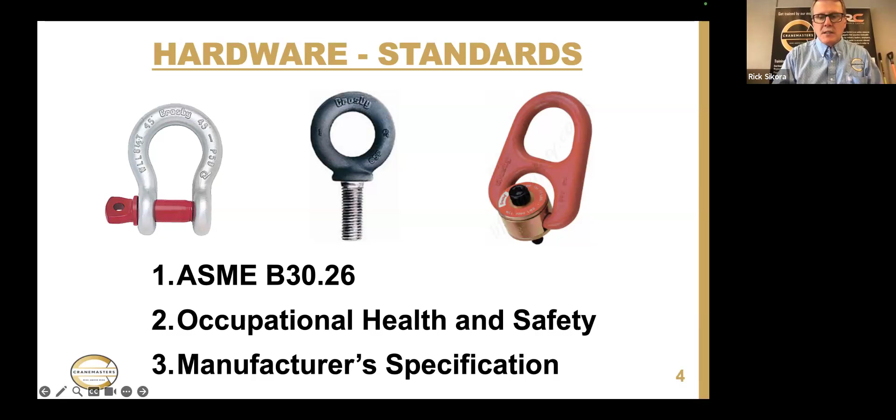Crane trainer - excellent, perfect. Okay, so we're going to read the owner's manual. The very first question I'll ask if something happens on your site: did you provide the worker the information to use the tool correctly? And we do need the manufacturer specifications available on site.

Design factor - what does design factor mean? When I say all your rigging equipment must be designed to a design factor, what does that mean?

What does design factor mean to us? Don't know, Karen, don't know. Safe working load, thank you. Engineered, Sean, thank you, good job. Excellent questions. Watch this here right now.

Watch what's happening, watch the shackle. What's it doing? It's distorting, it's elongating. It's giving me a warning sign before failure.

A 35-ton shackle broke at 280 tons. So on your job sites, how do you know if your rigging products will distort before failure?

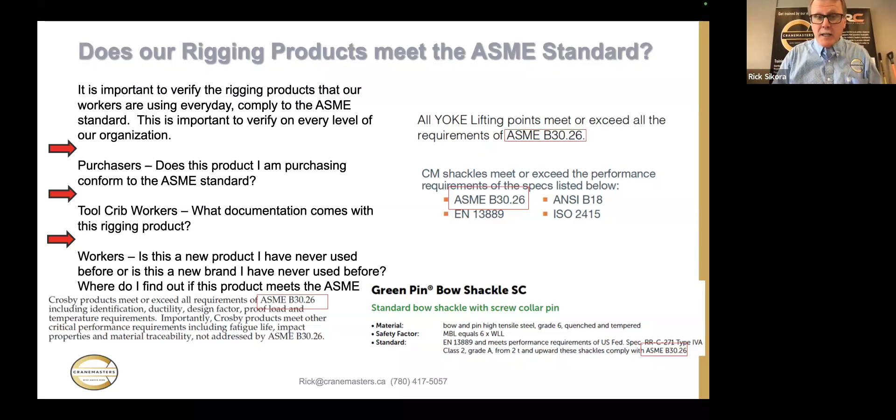How do you know that your rigging products have a 5-to-1 design factor? How do you know your rigging products, if it's rated for 10 tons, won't break until it sees 50 tons? The only way you know that is if it's built to an ASME standard.

What 3 markings must be on a shackle? What 3 markings must be on the body of a shackle? I'm giving you guys 8 hours of training in 40 minutes, so we're going to be quick.

Working load limit, weight limit, I agree. Working load limit. What's the most important thing to be on a shackle?

Rating, manufacturer's name, working load limit, manufacturer, thank you. Thank you, thank you. Pull angle, oh my goodness, Robert, thank you. Out of all those answers that were provided, which ones are correct?

And the most important one is manufacturer's name. No manufacturer's name, no use. Rated load, that's our working load limit. And size, the size of the shackle, okay? The rest of the stuff is extra, but the minimum standards are manufacturer's name, rated load, size.

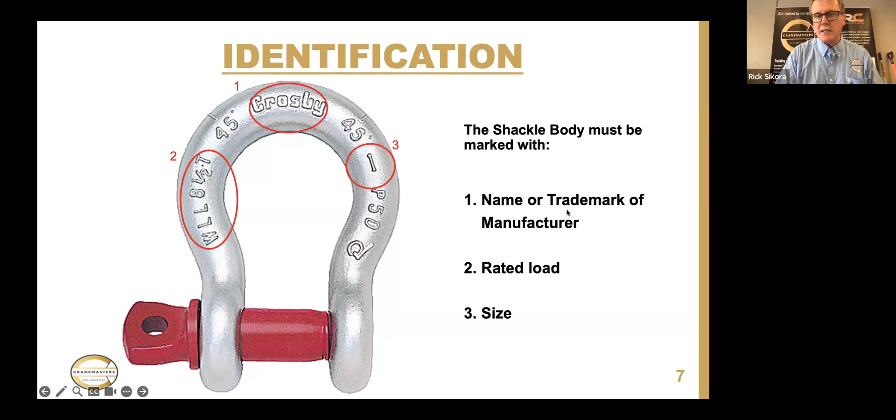Perfect. Why are manufacturer specifications so important? Because there's hundreds of different makes, models, and brands of shackles on site. Are all shackles made for lifting?

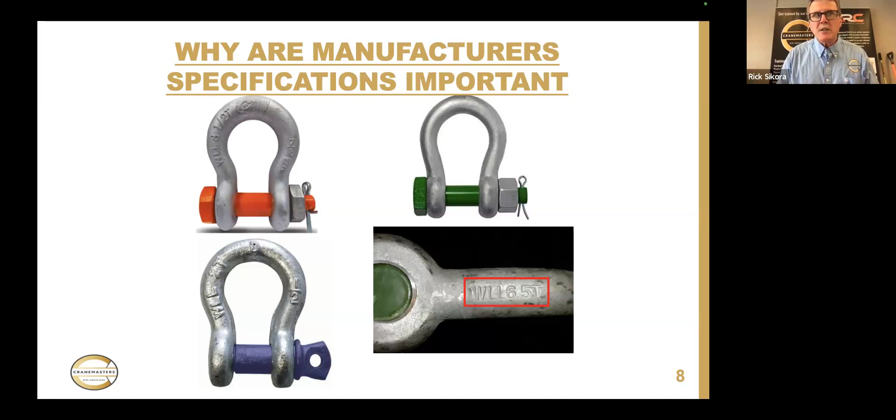No, Daniel says no, Alyssa says no. So if they're not all made for lifting, how would we confirm when they are made for lifting?

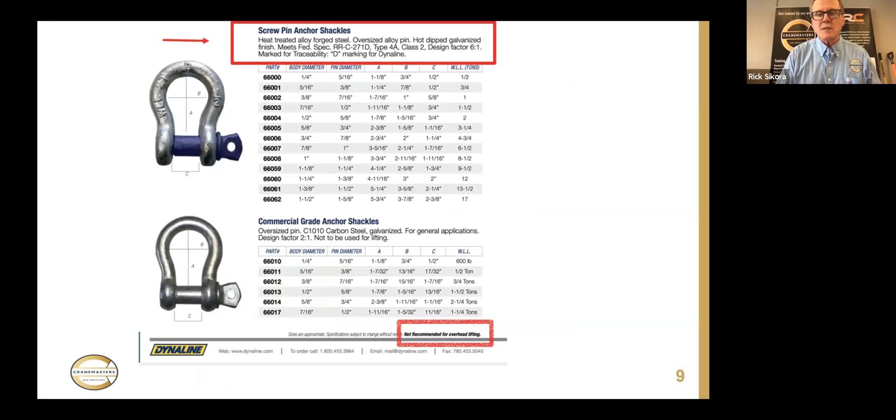And that is by reading the owner's manual. I'll let you know right now, if you read the owner's manual, some of them are going to say not recommended for lifting. So it looks like a shackle, it smells like a shackle, it tastes like a shackle, but that might not mean it's made for lifting.

What brands of shackles do you guys have on your job site? Crosby. Tanya, is Crosby made for lifting? Some are, mostly.

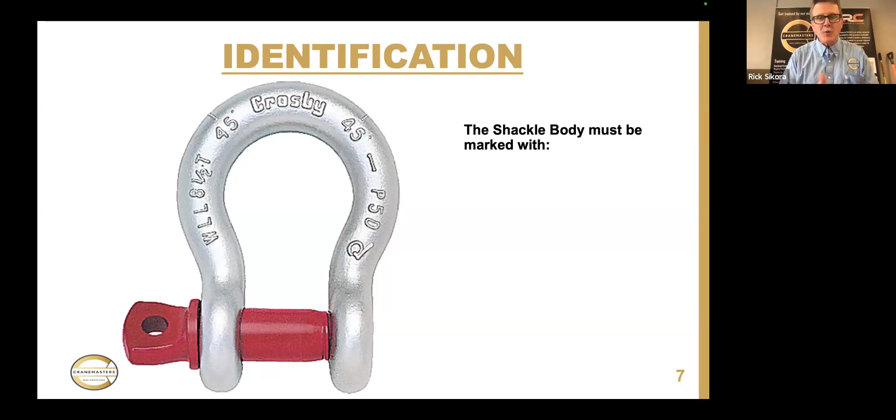How many people read the owner's manual? That's the key. We need to provide our workers the information to use the tool correctly. No owner's manual, no use.

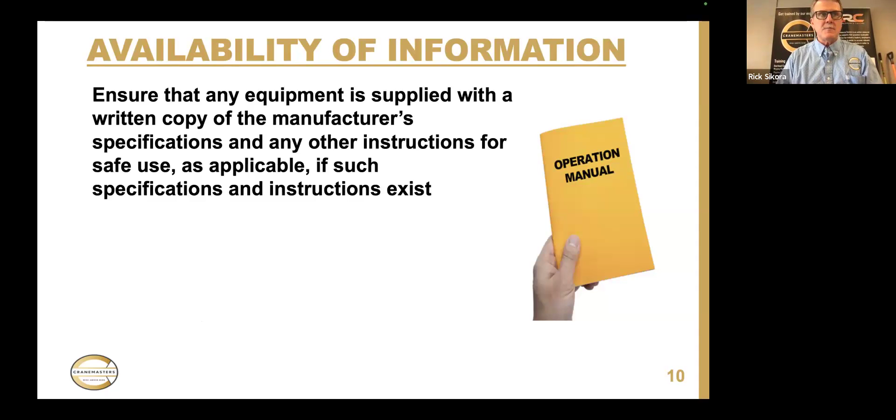Doug, have you ever heard of fake Crosby shackles, or shackles that are imposters?

Half a ton, 5 ton. Look at the manual. There we go, Robert. Look at the manual, there we go.

Did you know that eye bolts don't come with ratings on them? They usually only come with sizes on them.

The only way you know how much you can lift is by looking in the owner's manual. But half ton means the size of the bolt, not capacity. This only tells you the size of the threads.

So all those eye bolts that come on electric motors, pumps, and compressors, are those made for lifting? Do they meet the ASME standard?

What temperature range do you think eye bolts are made to? What temperature range? I don't know. Robert, don't know. Where would I find the information? Ask purchasing, only purchasers, Vanguard, and must be branded.

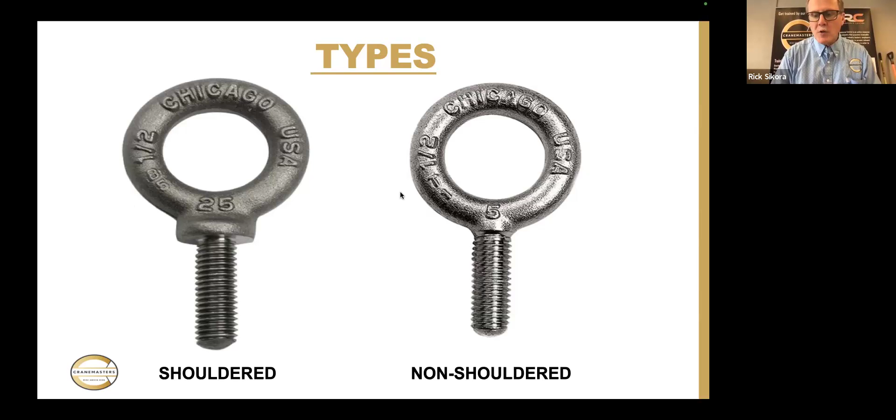No owner's manual, no use. Can't stress it enough. What standards must our slings be based on?

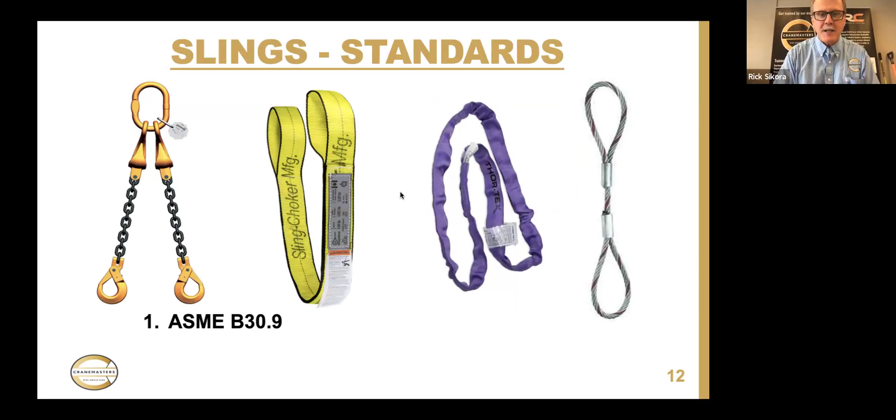What standards must slings be compliant to? ASME, there we go, fantastic. You betcha, and that's written in WorkSafe BC.

All our slings on site must have initial, frequent, and periodic inspections. Initial means when the rigging is brand new, someone from your company must inspect it for compliancy. Frequent means every time the worker uses it, it must be inspected according to manufacturer specifications. Periodic means at a minimum once a year, with records.

I want you to think about your job site you're at right now and in your shops right now. Could you go out there and take a look at every shackle, eye bolt, and sling and make sure it has a periodic inspection or some type of inspection tag on it? Yes or no? I got one yes, I got a lot of no's. How come? It's only been in effect forever. How come we're not doing periodic inspections? How come our workers aren't trained to make sure it has a periodic inspection?

All that's written in the owner's manual, all that's written in the ASME standard.

Does anybody have any bridle slings on site? A one-legged, two-legged, three-legged, or four-legged sling on site? Yes, double leg, yes, yes, yes. Good, good, good. No tag, no label, four-legged.

Karina, I'm going to ask you a question if you don't mind. If a one-legged sling's rated for 1,000 pounds, that means it's good for 1,000 pounds on one leg. A two-legged sling rated for 1,000 pounds, does that mean it's rated for 1,000 pounds on one leg or two legs? Two legs. Two legs straight up and down, or two legs at 60, 45, or 30?

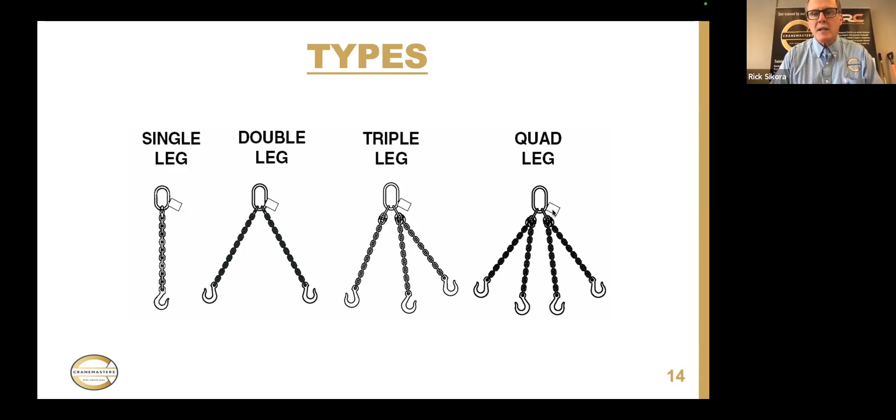But more importantly, what we have to learn today is when the Ford's stuck in the mud and the Dodge comes to pull it out, do we stand next to the tow rope?

I like the no's, I like the no's. What's telling you not to do that? What's telling you not to stand next to the tow rope? Because there's stored energy. Trust me on this, is there not the same stored energy in the sling? How come we're not scared of the rigging slings, but we're petrified of it as a tow rope? Just think about it, it's the same concept. We need to get away from there.

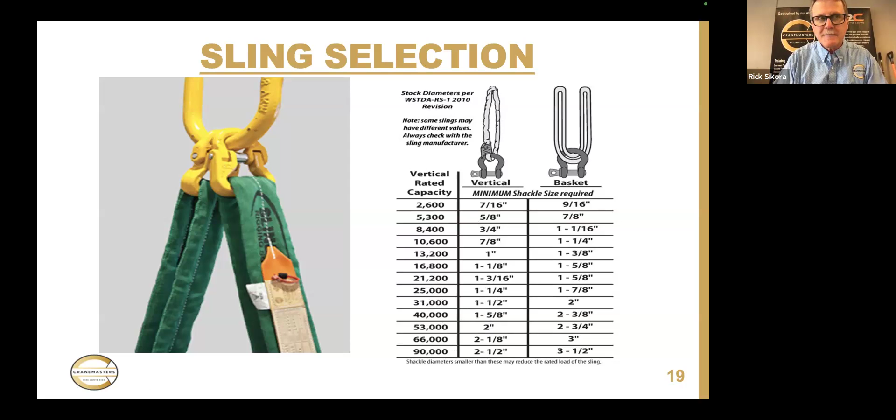How many people in this room have actually ever seen a manual on a polyester round sling? Here's one, never seen a polyester round sling before. Do you know how to have any? Here's a polyester round sling and the owner's manual. It says it must go around 7/8 of an inch.

What do we use to protect our slings from damage? Softeners. What's a softener, Tanya? Rubber. I wish you were here, I'd give you a keychain and a coffee mug. Absolutely incorrect. Leather gloves, incorrect.

Cut resistant material, thank you. And you probably can't see me, but we've got all kinds of engineered manufactured edge protection. Engineered and manufactured edge protection, or else we're assuming. I don't want to give you a number, but probably half of the rigging accidents I investigated between Alberta, BC, and Saskatchewan over the last 2 years were caused from improper edge protection.

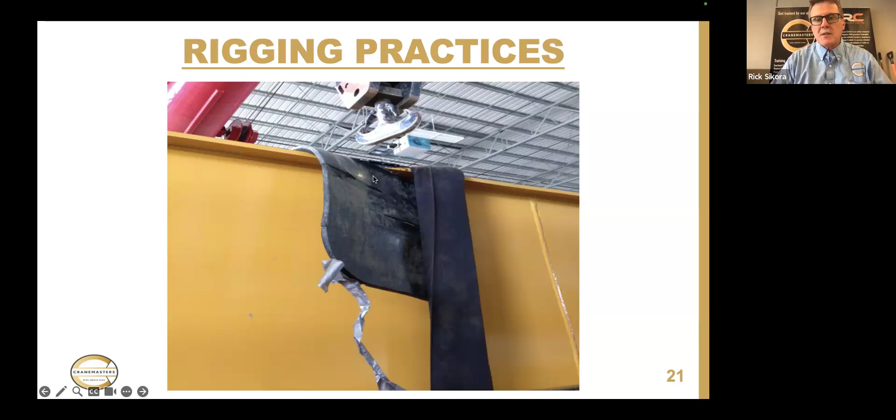This company here assembled the crane. They made the lift, we tried to stop the lift. They said no, it's going to be absolutely fine. They did a test lift. And when they lifted it, the slings blew open like butter and this whole crane came crashing down to the ground.

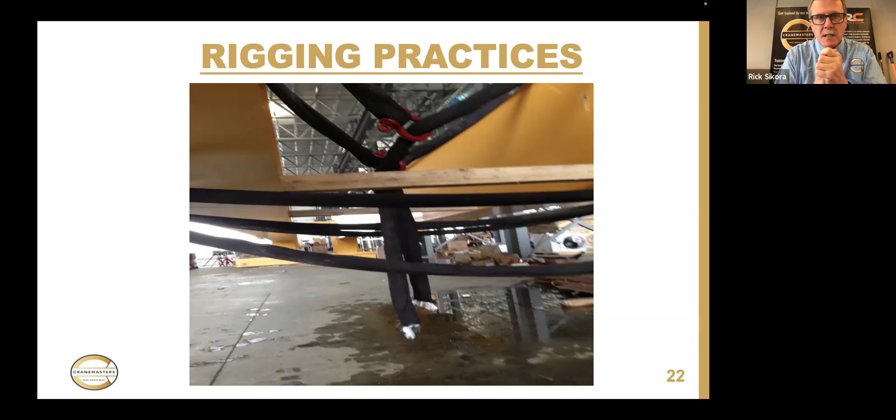If you're ever on a job site and you're questioning whether the sling might get cut in a lift, you have to use manufactured edge protection. I'm watching my time here. Is edge protection mandatory? 100% it is, Michael. Right here, perfect, thank you.

Perfect timing, right in the WSTDA bulletin, that's Web Sling and Tie Down Association. Abrasion protection will not prevent damage from cutting. If protection against cutting is necessary, use only protection that has been designed, tested, and rated by the manufacturer. Thank you for that. So all our slings must be compliant to ASME. ASME says all our slings must be built to the WSTDA standard. Here's samples of different types of manufactured edge protection with ratings.

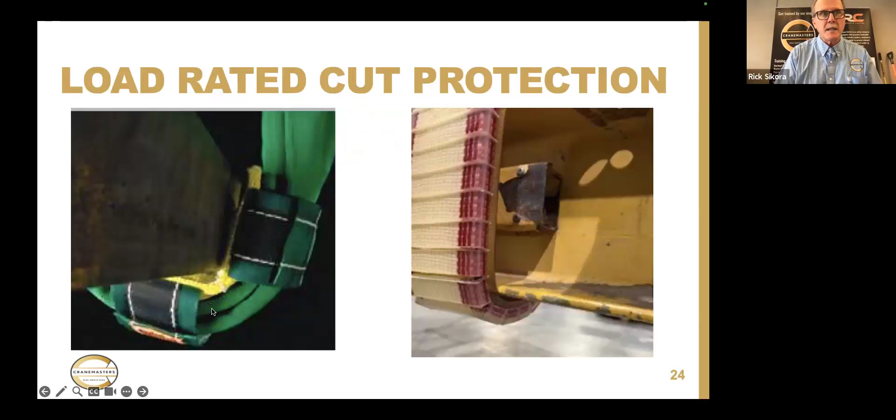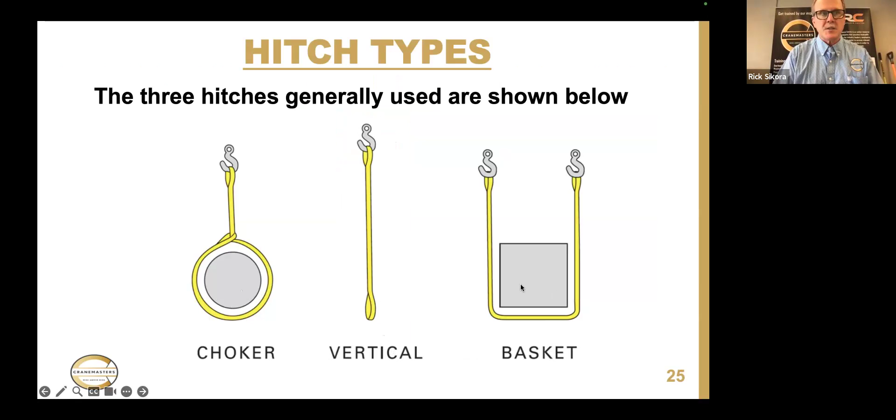When we're using our slings, we have 3 different types of hitches: choker, vertical, basket. Choker, vertical, basket. Vertical is 100%. Choker is about 75% of 100%, and basket is 200%.

In industry, we have the vertical, choke, basket. We have a modified basket. We have a double wrap choke. We have a double wrap basket. What's the purpose of double wrapping?

What does WorkSafe BC say about double wrapping in your act? Mohammed, great, prevent it from rolling. Sean, great, it says any item that is longer than 10 feet, more than 2 pieces, must be double wrapped for load securement. How many people have read the rigging section in WorkSafe?

Tanya, yes, okay perfect. And then we have an adjustable sling. So there's many different types of rigging configurations in industry. How do we make our workers competent in all these different types?

In your company right now, think about your company. How many people have a hoisting and rigging policy? How many have one that references standards? How many have one that identifies competency? It all needs to be clearly identified, please.

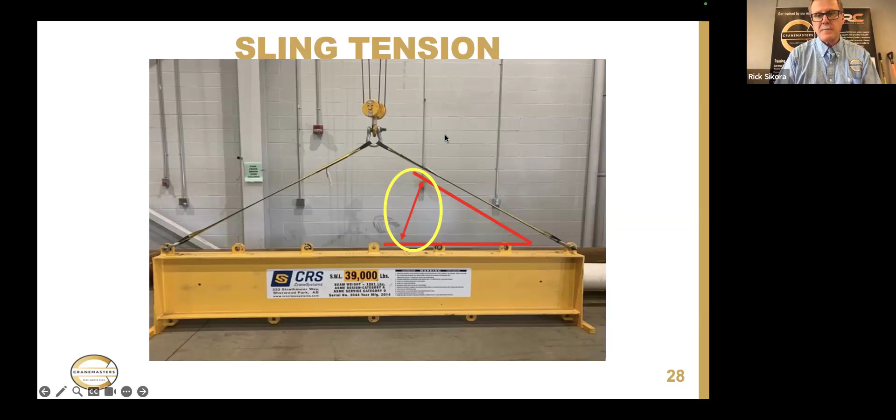So if the center of gravity on a lift was in the middle, that's your balance point, and you had two slings attached to the load, you could say there's 15,000 pounds of tension on each sling, 30,000 divided by 2.

If our slings are at 60 degrees, we look in the owner's manual and it says your multiplier is 1.155. So with two slings holding a load, I go 30,000 divided by 2 times 1.155, meaning I need a 17,325 pound sling here and a 17,325 pound sling here.

Thank you, Doug. It increases. At 45 degrees, I look in the owner's manual and it says it increases by 1.414. So 30,000 divided by 2 times 1.414, I need a 21,000 pound sling on this side and a 21,000 pound sling on this side. If I put a scale right here, it would read 21,000 pounds.

And at 30 degrees, it says multiply the load weight by 2. 30,000 divided by 2 times 2, I need a 30,000 pound sling here and a 30,000 pound sling here.

So what this means is, if we go back and look at a choke hitch, putting it in a tight choke hitch can derate your sling by half. And then when we apply it onto our load, we can really overload our sling.

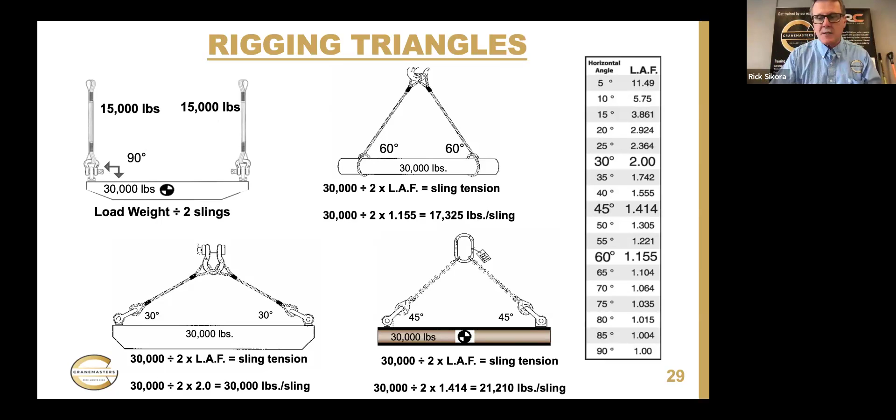You probably can't see my face here, but you have a built-in protractor in your hand. This is 0, this is 30, this is 45, this is 60. You can always tell sling tension by using your hand.

When you lift with 4 slings, we got 10 minutes here, I got to go fast. When we lift with 4 slings, how many slings hold the load? Answers varied: 4, 4, 4, 4, 4, 3, 4, 4, 3, 4, 3. Who's right?

Who's right? Let me rephrase the question. We're going out for supper tonight. We're going to come down. We're going to train our employees to be competent, and then we're going to go out for dinner later because we had a hard day.

And I sit down at the table and I put my elbows on the table and that table rocks to me. Then you're going to come down, sit at the table, and the pack of matches slipped out from under one of the table legs. You put your elbows on the table and the table rocks to you. When the table is rocking, how many legs is it rocking on?

Jim says 2. Shelly says 2. Tanya says 2. Oh my goodness, absolutely right. What moves first in this room today?

What moves first, the crane or the load? The crane. The crane takes off, the load dips, the load catches up to the crane. Then the crane stops - what does the load do? It's identical to that table at the restaurant. It's always rocking on 2 legs.

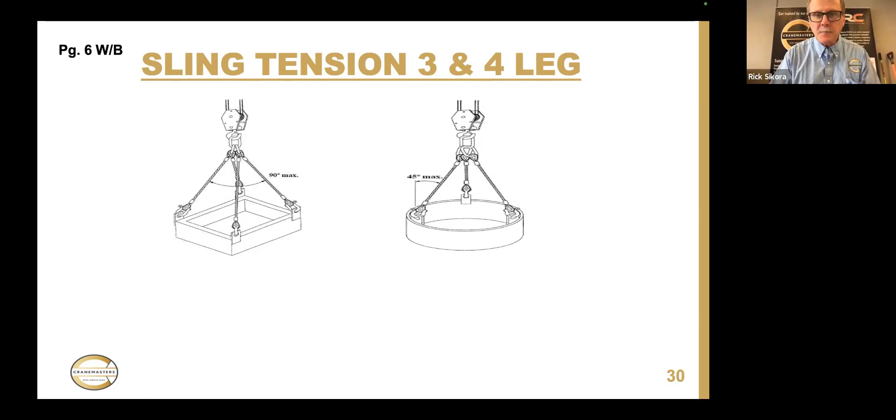Out. Check the manual, look in the manual. Before I say the owner's manual, what would you assume? In or out? In, out.

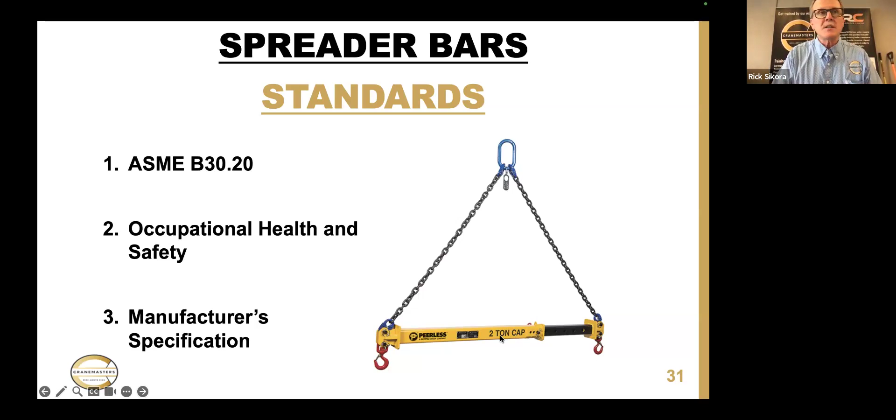I'm loving this interaction today because it's really proving our point about inconsistency and lack of competency, and lack of a clear understanding of what we need to do to change this industry. We are going to change this industry. We're going to read the owner's manual. We can all agree it's strongest all the way in, and it should be rated for the weakest link all the way out. We don't know unless we read the owner's manual. We can't tell. Please don't assume when we rig, and please question everything we do.

We have plate clamps, beam clamps, magnets, grapples, and all these different types of devices. Is there any one of these devices that you guys are using right now that you've seen in your shop setting?

Beam clamp. Tanya, do they use a beam clamp to support a load to hang rigging from, or do they use a beam clamp inverted to pick up a beam? I've seen it both ways. You betcha. Did you know that most beam clamps can't be used at an angle?

Thank you. Magnets - when's the last time you sent your magnet out for a periodic inspection? Is a magnet good on thicker steel or thinner steel? If a plate is 1 inch thick, can it be longer than a quarter inch plate, or shorter? How many surface scratches are we allowed to have on the bottom of a plate clamp? Have we given the workers the owner's manual of a plate clamp magnet?

On a plate clamp, can you take a plate from horizontal to vertical? If the plate clamp is rated at 2,000 pounds, what's the minimum weight it can lift? Doug, if the plate clamp's rated for 2,000 pounds, it can lift a 2,000 pound plate. What's the minimum weight it can lift? 0, 50, 500? Doug, do you think it needs weight for bite?

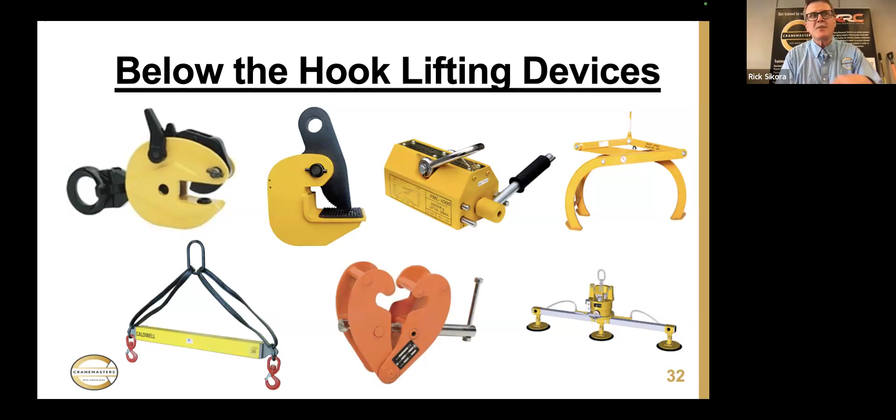Look in the owner's manual, Sylvanus. Thank you, thank you, thank you. I can't stress it enough - please look in the owner's manual.

How many people on site have ever used a lever hoist or a hand chain hoist? How hard are you allowed to pull on the handle? Let me rephrase the question. Have you used 1 arm? Have you used 2 arms? Have you used 2 arms and a boot? How hard are you allowed to pull on a hand chain?

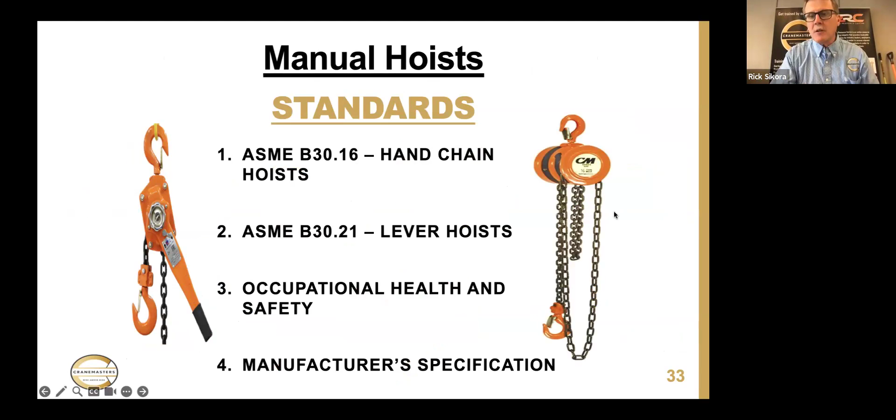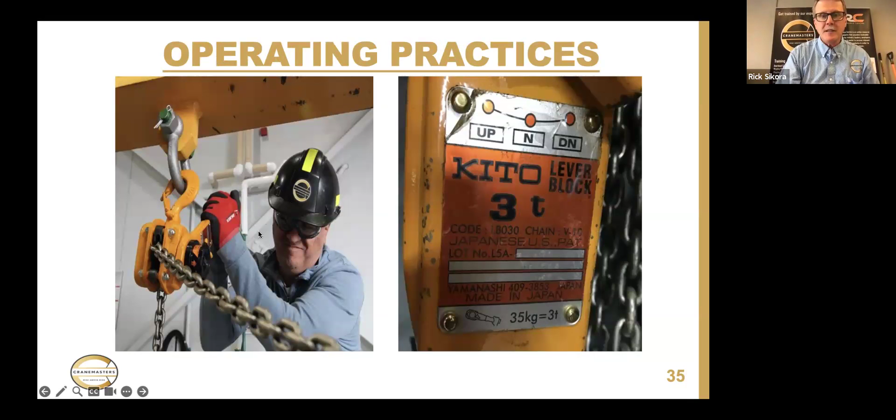You can't wrap the chain around anything. Safety latch has always got to be closed.

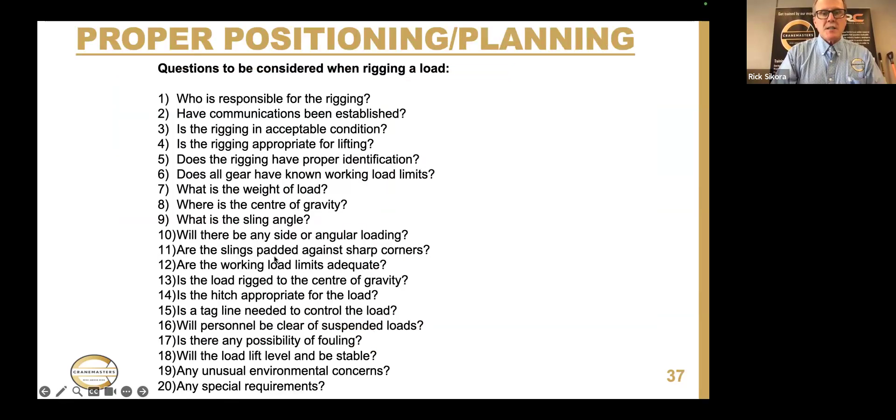Here's 20 questions to consider when you make a lift. I'm just going to skip those right now.

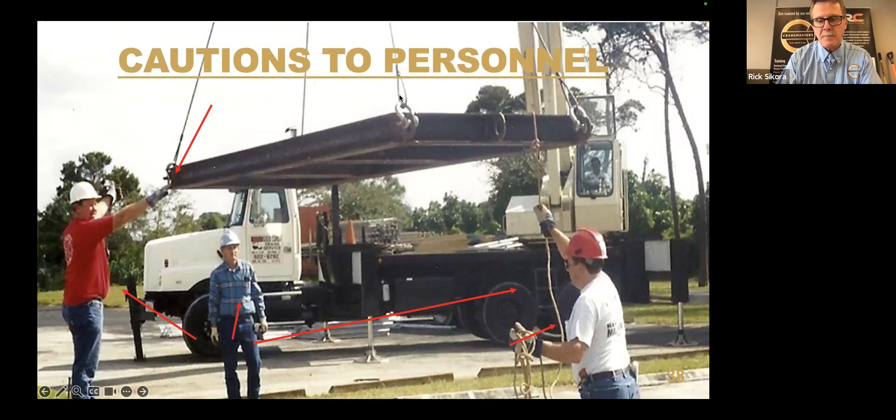Where's the sling going to go when it breaks? Okay.

Good. There's a new product in the industry called no-touch tools. We have push-pull sticks. We have hookets. We got grab hooks. We got magnets, and magnets with handles on them. There's all kinds of no-touch tools.

So in industry right now, there's all kinds of tools out there to prevent the worker from being near the load. It's quick, it's handy, it's fast. It doesn't work in all applications, but you can push and pull, or if you have to grab a tagline, you take the no-touch tool, hook onto the tagline, and pull it towards you. Okay.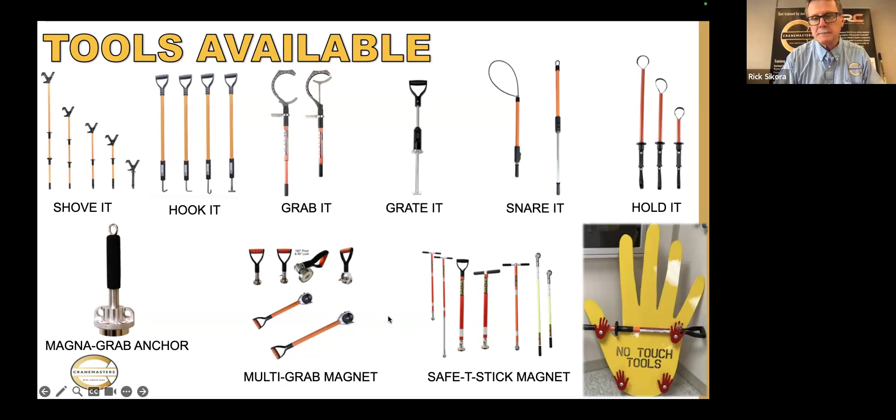We lost a worker in 2013 in Alberta. We applied for creative sentencing funding from the government to start making industry a safer and better place, leading to the Rigging Resource Center.

This site was designed as a free resource for anyone working with rigging equipment. It was developed in 2013 after a fatal rigging incident in Acheson, Alberta. The company involved pleaded guilty under OH&S and was fined. The funds were then awarded to MSA in partnership with Cranemasters to create the Rigging Resource Center.

The Rigging Resource Center can be used by employers, supervisors, or workers involved with the use of rigging components. To get started, look for the product you require information for. You can choose from a variety of rigging products, including slings, hooks, hardware, below-the-hook lifting devices, or manual hoists, and there's even information on non-commercially manufactured devices and lift planning.

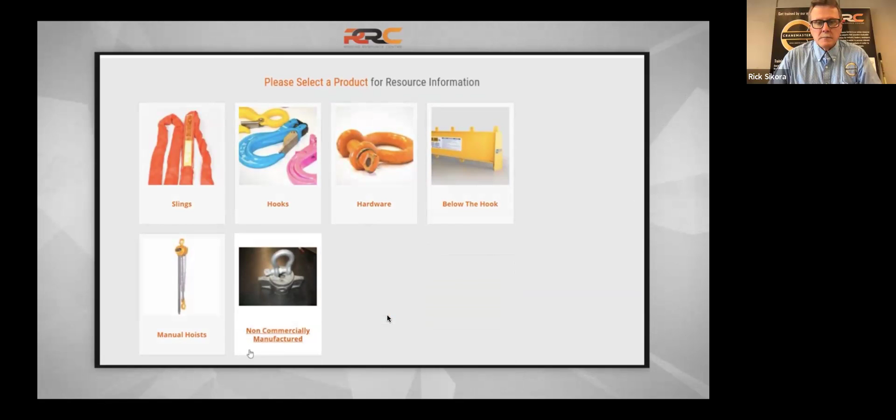For example, if you click on a shackle, the website will provide you information on the shackle requirements referenced from Alberta OH&S and ASME standards. The website will also provide information on the product's required markings, training, inspection requirements, and removal criteria.

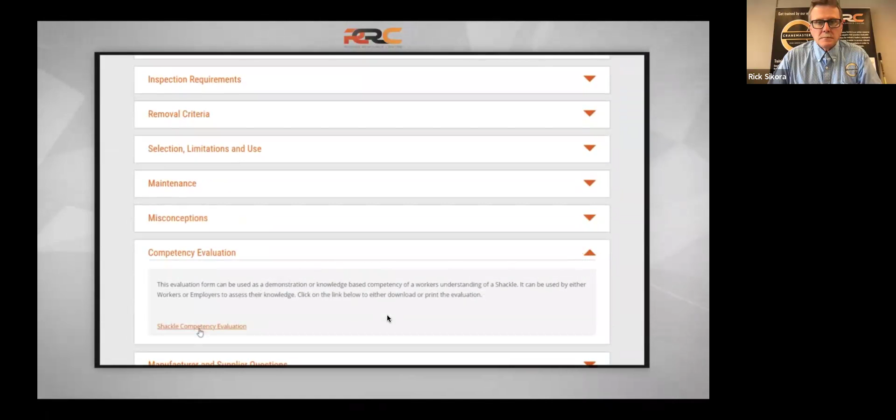Near the end of the item's page, free printable resources are available. They can be used to test a worker's competency or provide questions to ask your rigging supplier. There are even printable toolbox talks to help with your next safety or toolbox meeting. Once you have gathered the information you were looking for, challenge yourself by taking a short quiz to test your product knowledge. For any questions or more information, please contact us through our contact page.

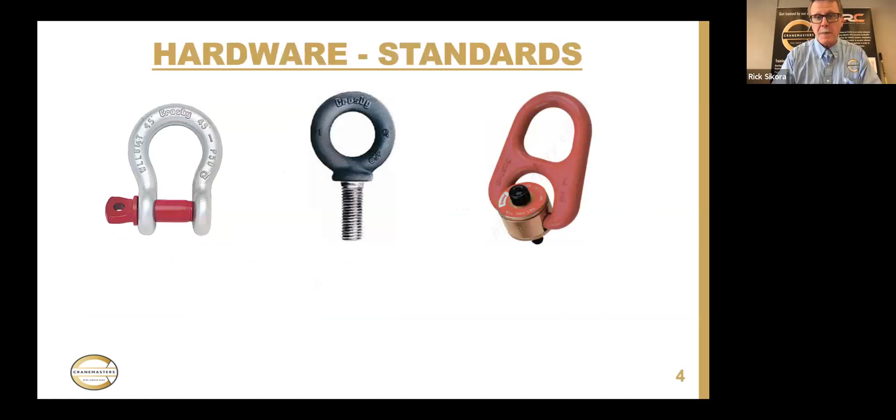So the question is about shifting load weight while rolling units over 20,000 pounds. Is it a round unit we're rolling, or a rectangular unit we have to flip 180 degrees? Double chain basket—okay, that's a really neat one, and chain is a real neat one. If I go down to chain, the first question I have for you: can you basket a chain? What is the radius the chain must go around? Because chain can never go around a 90-degree corner without edge protection.

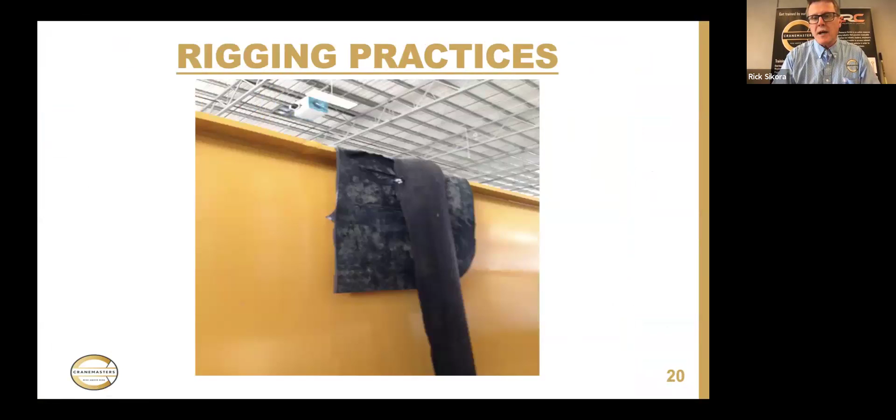What happens to my capacity of a chain when I put it in a basket? Because the chain's always made in a single leg. What happens when I take the chain and now basket it back up to the same ring? What happens to my capacity on the chain?

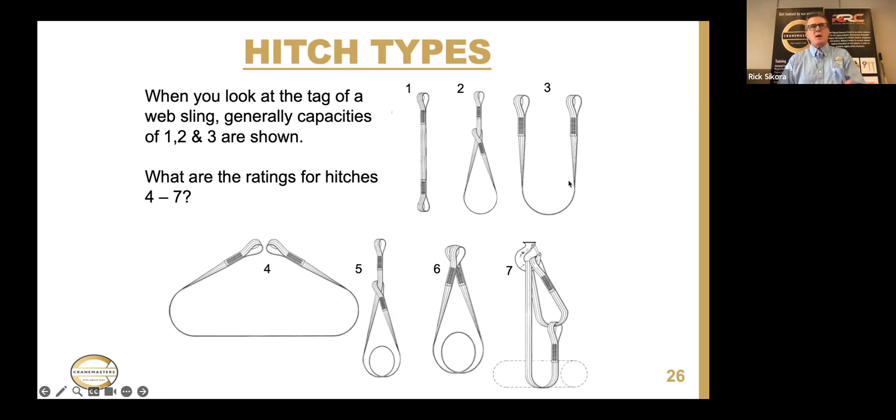Doug, would the rigging product actually slide in the chain, or are you trying to secure it in the chain to prevent it from sliding? If you send Braden a quick email with a picture, I'll give you all the regulations and questions to help you out, because I'm not understanding it 100%, but I can definitely give you sample guidelines.

Great, Doug, please be in touch with us around I-beam. Okay, round I-beam - chain can't go around anything square or a sharp I-beam. So in this picture, chain must go around 2 times its own diameter. For the chain to get its full rating, it must go around 6 times its own diameter.

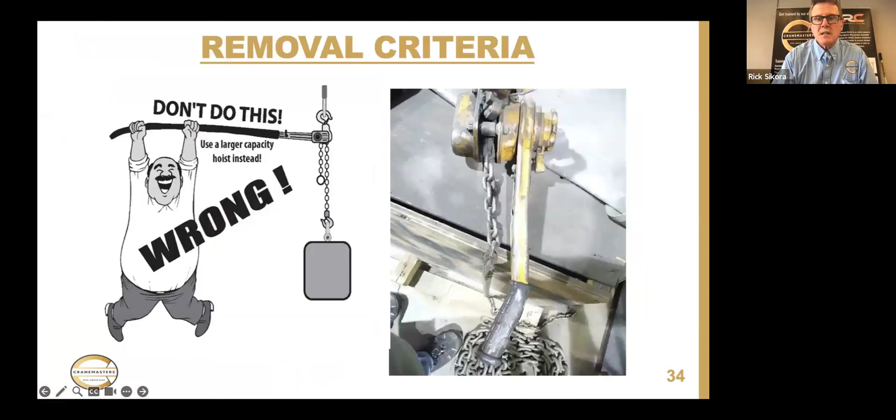Doug, just to reinforce something really quick here, going back to the chain: if this chain link size is 1/2 inch, it has to go around at least a 3 inch radius. So 6 times its own diameter is number one.

A soft steel softener, thank you Doug. You know what I mean? As long as we get that radius there, and we don't want the chain links to slide on the softener - we don't want the chain link sliding. Doug, if you don't mind, send me a picture and I'll help you out on that.

These are the amazing questions, and these are the fun questions, and these are the challenging questions. I appreciate that, Doug.

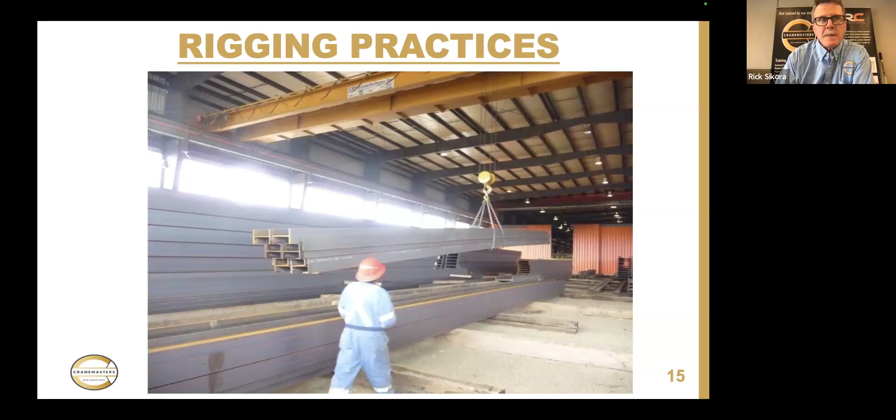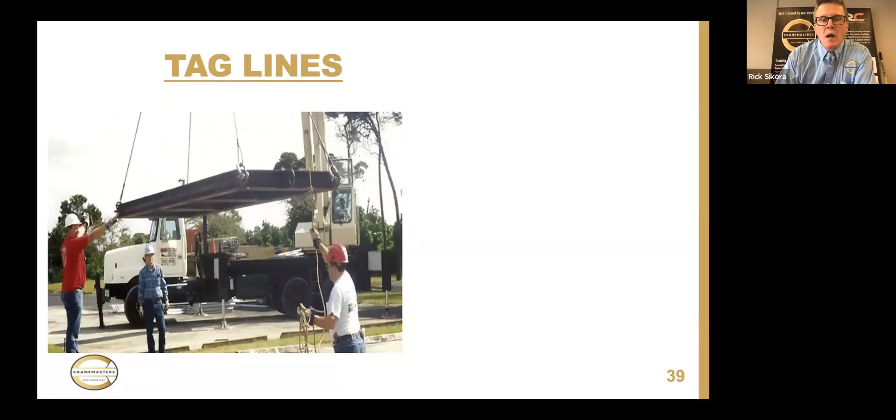Thank you, Doc. Rick, I have another question here from another attendee: can you use a shackle if the manufacturer information has worn off? Oh, that's a great question. So ask yourself the simple question: if I grab a shackle and the information is worn off, would it pass a periodic inspection?

Absolutely correct - you guys answered the question in the chat room. No manufacturer's name, no use. If it's worn off, from a common knowledge point of view, you still know it's okay, but if it lived a life where it actually wore off the name of the shackle, it's probably had a good life already and it's time to remove it from service. The answer is no.

Thank you, Rick, and that was the last question. Thank you very much. No, for sure - we're here for resources. Help us encourage and change this industry, and we are going to make it a safer day.